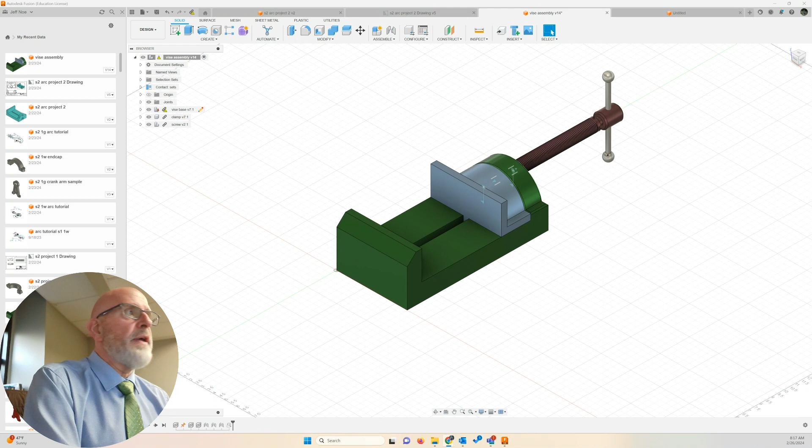So we're going to do the green portion today, which is the base of the vise. So what we're doing today will look like this. We're going to start it from the side profile. Okay. We're going to put this on the front back plane. All right. So we're going to start by sketching out this side, excluding this angle here, which will be a chamfer we apply in the last step.

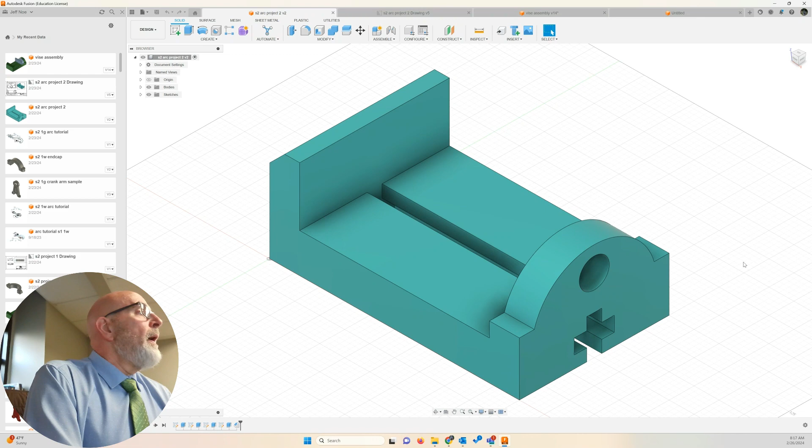And we've got our dimension drawing. So we're going to draw two rectangles, this view here from the side. So we've got 250 millimeters as the overall length here. Looks like it's going to be 100 millimeters tall here at the back and 30 millimeters wide. So two rectangles, one 250 by 40. Okay, this is going to be the origin right here at this bottom corner. Then from the origin as well, 100 millimeters by 30 millimeters.

We'll trim out the interior, extrude it across the full width, which happens to be 150 millimeters. And that will be the foundation of our base. We'll come back on the front face of our design, and we're going to create this slide. This is a groove for the vise piece that moves back and forth to slide along.

Okay, we're going to create that groove on that front face of our design, and we'll figure out the midpoint of that face and draw a couple 40 by 15 rectangles, and then extrude it. And instead of extruding a certain distance, we're going to extrude that shape back to an object, and it's going to be this back face. That way, if we happen to change the length of our design, our extrusion will adjust with it.

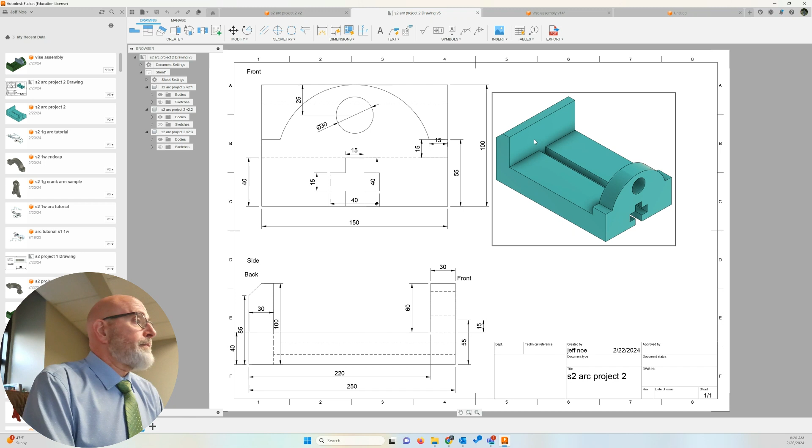Extruding to an object is often very convenient. We'll use it in several other projects like the Lego brick project, for example. Gives us a lot of flexibility. Also, if we are extruding to a shape that's curved, it's got an arc in it, by going a set distance, your extrusion will go out that set distance and it won't accommodate the curve. If you extrude to the object, it'll extrude to the face, that arced face of an object, and take the shape of that object that you're extruding to. So, nice features with the extrude to object.

Then we'll create this upper section. We're going to draw a line across the bottom. We'll draw lines up 15 millimeters and over 15 on both sides. From the midpoint, we're going to draw a construction line up 60 millimeters. We'll have the 3 points then to a 3-point arc. Okay, create that, extrude it back 30 millimeters, and then place our hole, which is 30 millimeters in diameter, 25 millimeters from the top center of our arc here. Let's get started.

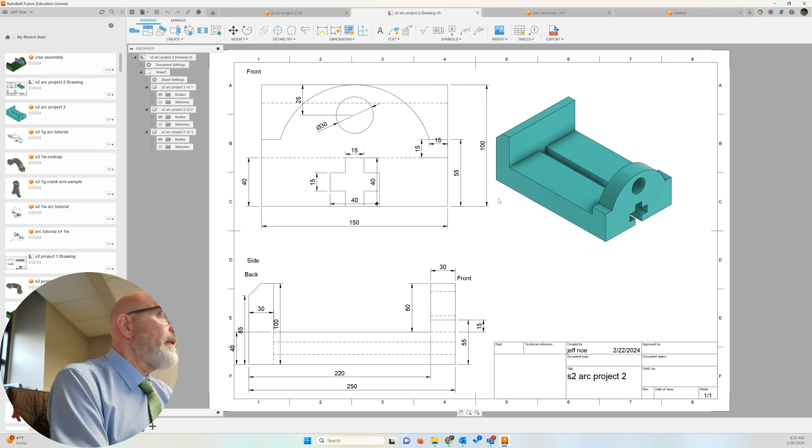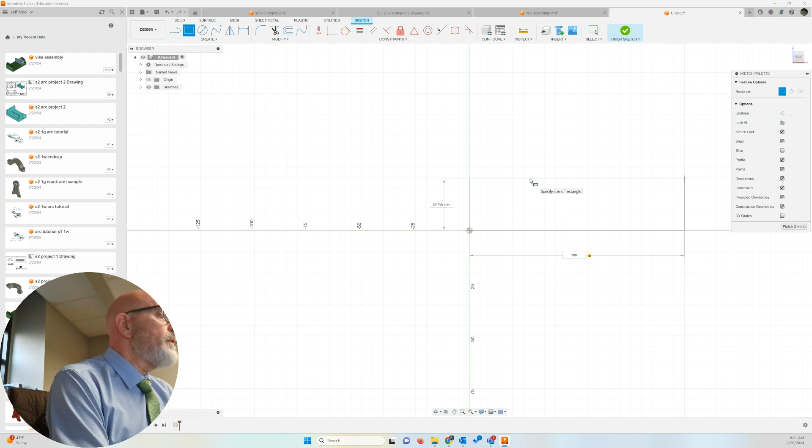Okay, let's create a sketch. We'll go to front back plane. Let's create a 2-point rectangle. From the origin, click 100 millimeters. No, that's not right. 250 millimeters. All right, by 40. Okay, let's fit. There it is. Let's draw our second rectangle, which is going to be 100 millimeters by 30. So there's the 30, 100 millimeters tall.

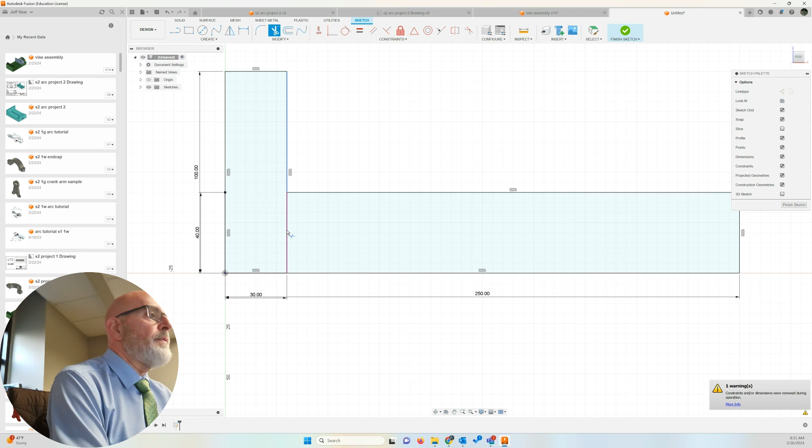All right, see that? Let's trim away the interior lines. Remove and remove. Let's finish sketch. Home position. Let's extrude 150 millimeters. New body. Click OK. Notice I'm trying not to give you all the menu commands as much as what I normally do. I'm expecting you to know that by now. Let's create a sketch on this front face.

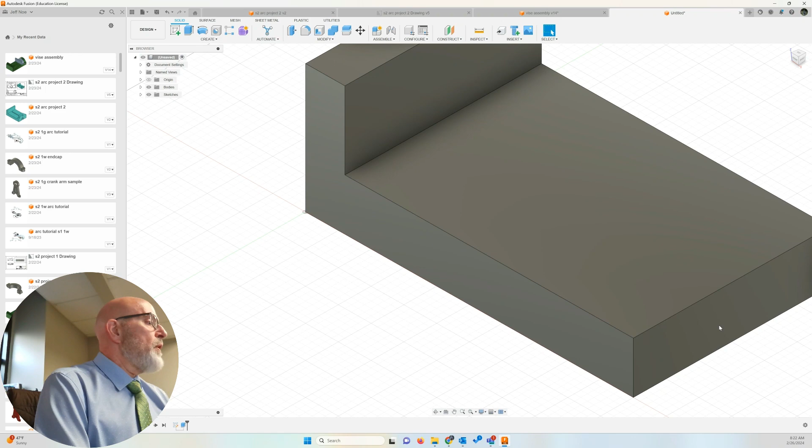Move it over. Zoom in a touch. Okay, so there's the front face we're sketching on. I need a center point. Now, if we draw a center rectangle, we'd get two diagonals. And where those two diagonals cross would be the center point of our rectangle.

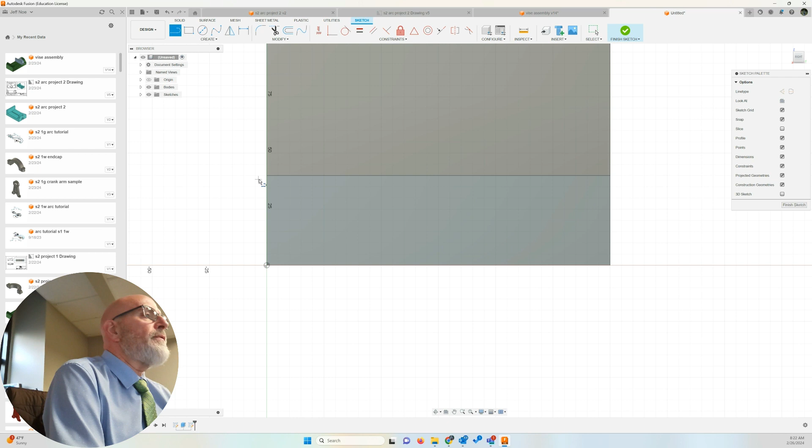So let's draw a line from one corner to the other corner. There's a diagonal. Let's toggle it to construction. So I'm going to hit X, select it, hit X. Now, do I need to draw the second line? No, I do not, because Fusion will give me the midpoint of this line, which is where the second line would cross it. So let's create rectangle and center rectangle. Let's find the midpoint.

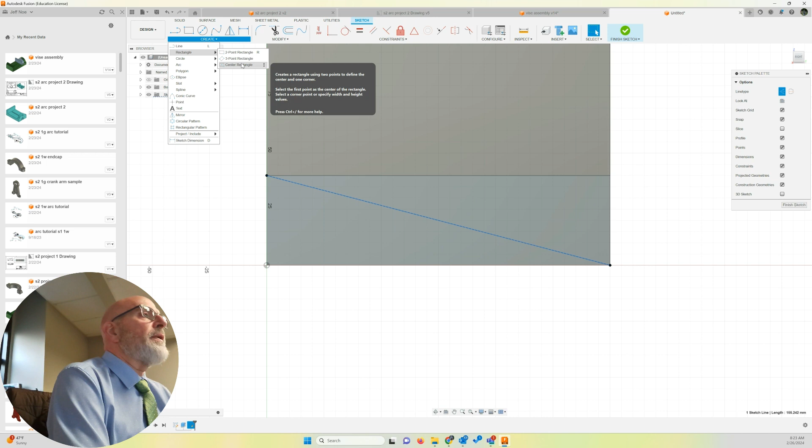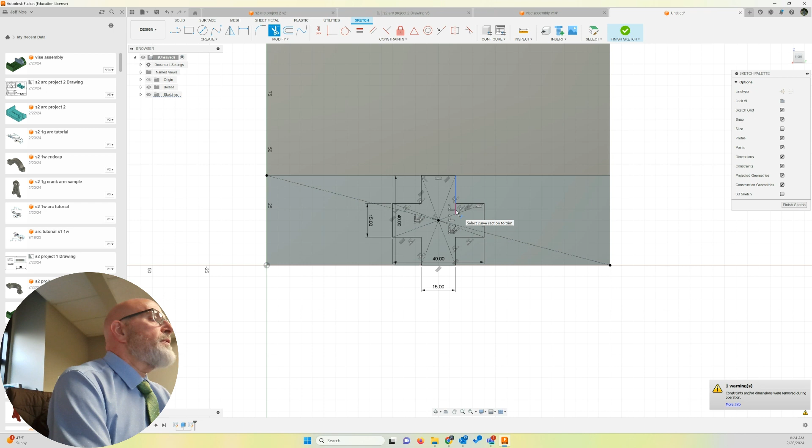There's my triangle. Click. All right, my first one's going to be 15 millimeters wide, 40 millimeters tall. Okay, let's draw a second one. All right, 40 millimeters wide, 15 millimeters tall. Let's trim out the interior portions of this. So isolated lines aren't going to hurt anything. There, I have an enclosed shape. All right, let's finish sketch.

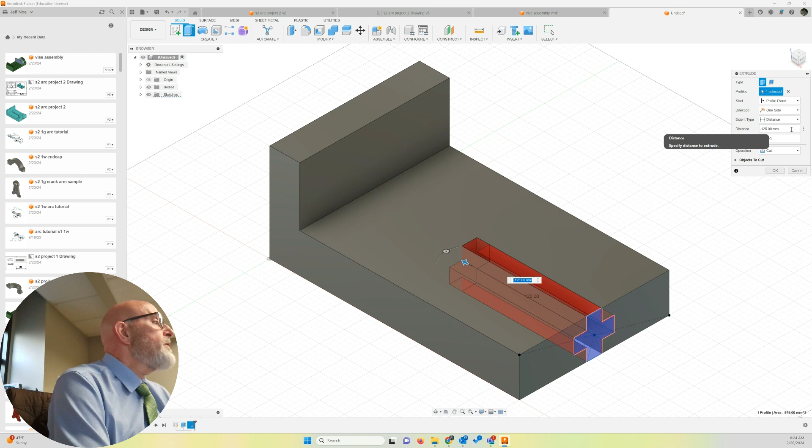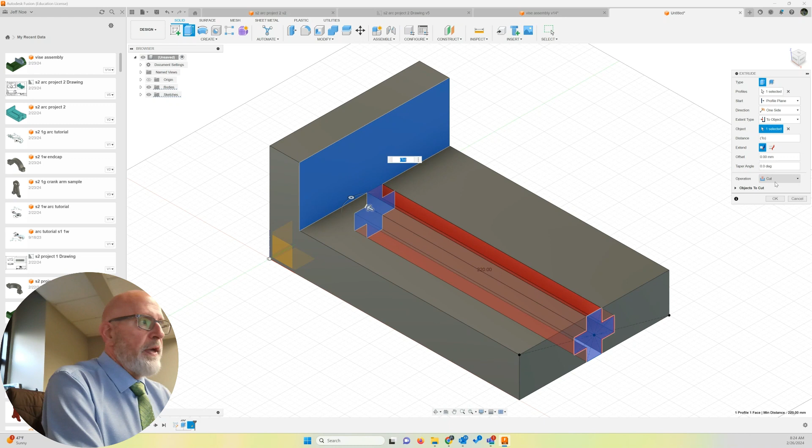Home position. Let's extrude. Now, as I said, I'm not going to go back a distance here. Let's change our extent type from distance to object. All right, I lose my dimension box. And now I need to select my object. I'm going to select this face as the object. And it extrudes back to that object. It is an operation of cut, which is exactly what I want. Click OK.

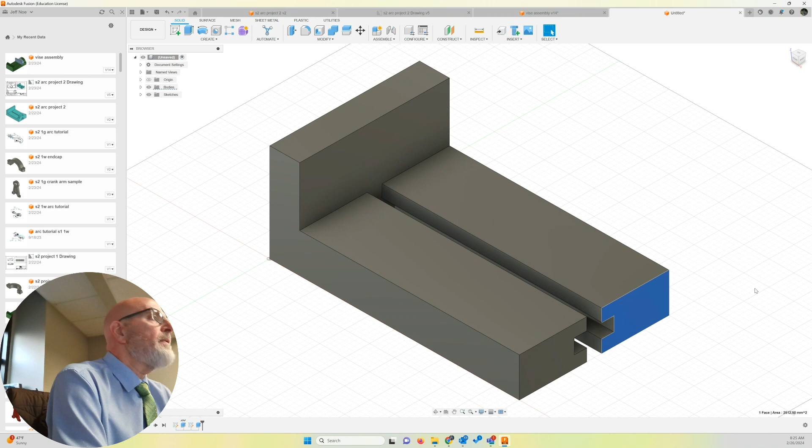All right, now let's create a second sketch on one of these faces back. Okay, we're going to select that face right there. Let's create a sketch. There's that face. Let's fit. All right, now I won't have access to the geometry on this side or to the edges. I don't think anyway. But I'm going to start at this corner.

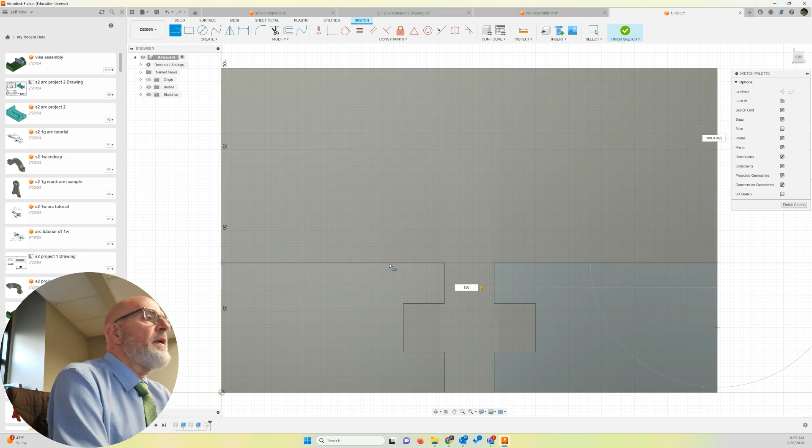All right. I'm going to draw a line straight across 150 millimeters because that's the width of my design. Click. I'm going to go straight up 15 millimeters. Click. And over 15. All at right angles. Okay. So there, see my constraints as being perpendicular. All right, oops, close the line tool.

Let's do this side, up 15. No, it's not perpendicular, is it? Undo. Let's try it again. 15 millimeters, 90 degrees, good. Click, and 15. 90 degrees, good. Escape out of the line tool. All right, well, actually, I needed one more line. I need it from the center point here.

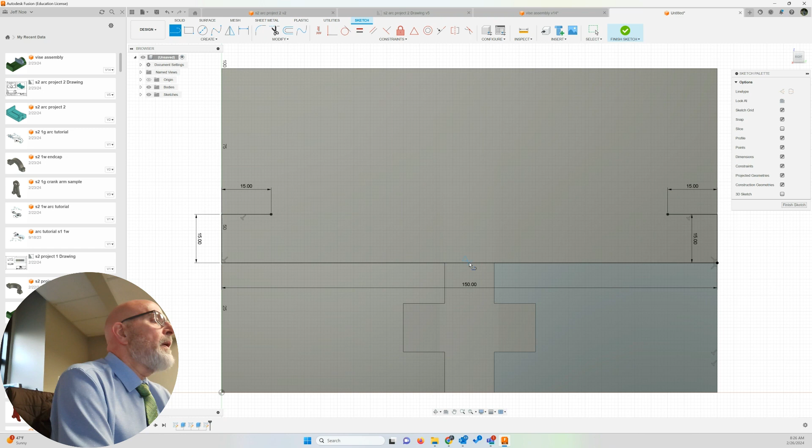All right, our total height is 100 millimeters. This bottom portion is 40, so I need to go up 60. So there's my midpoint, 60 millimeters. Click. Escape. And it's thinking about it. Now I'm going to hit X, select the line, hit X, and I'm toggling to a construction line.

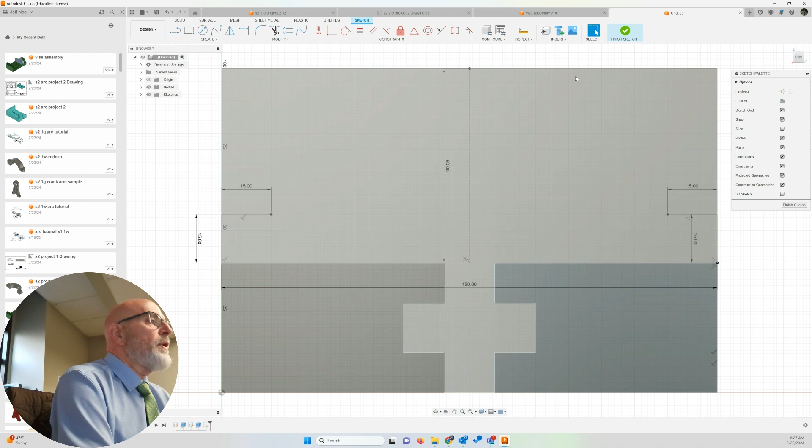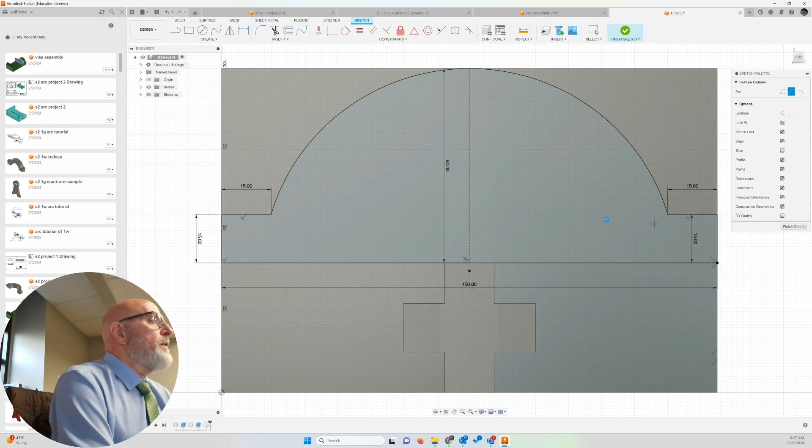Let's draw our arc now. Create arc, 3-point arc. First endpoint, second endpoint, up the construction line. There we are. There's our enclosed shape. Finish sketch, home position. Let's extrude at 30 millimeters back into our design. Extrude, -30 with a join. Click OK.

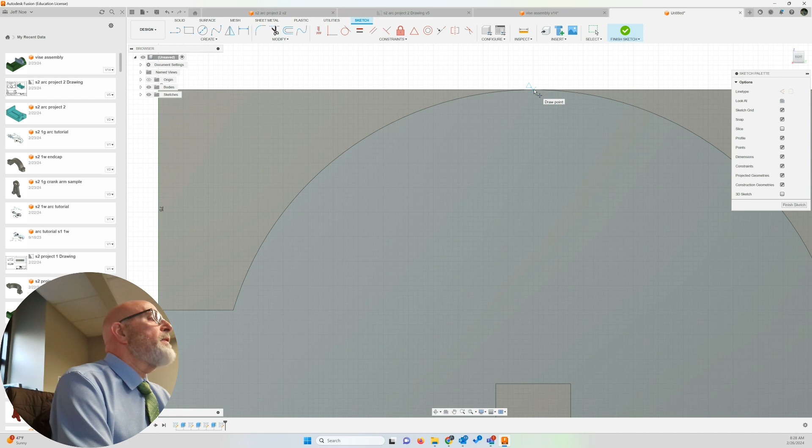Last sketch. Let's create sketch. We're going to go back to this front face. All right. I want to set a point. So create point. This is just going to give me a point that I'm going to use. I want it at the midpoint of this arc. There it is. Click. So there's a point. Now, let's create a circle. Anywhere in here, 30 millimeters in diameter.

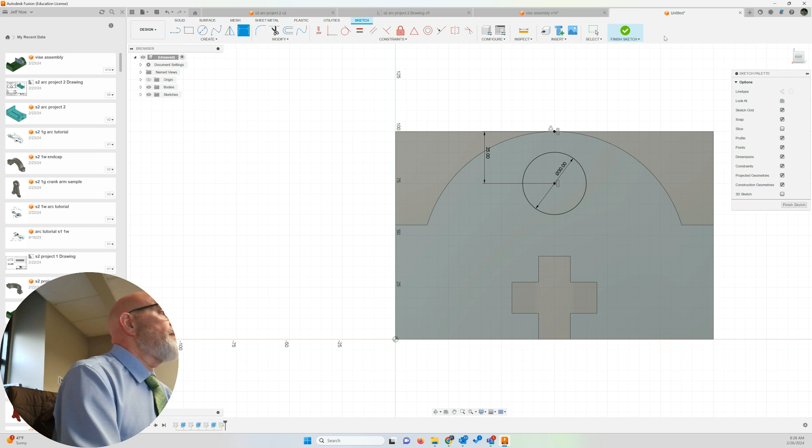All right. Now, I set that point on the midpoint, so it should be tied to that. Let's set a vertical constraint from the center of the circle to the point. Make sure that they stay vertical. And a sketch dimension then from the center to the point of 25 millimeters. And there we are. We have the hole in place. Finish sketch. Home position. Let's extrude that hole.

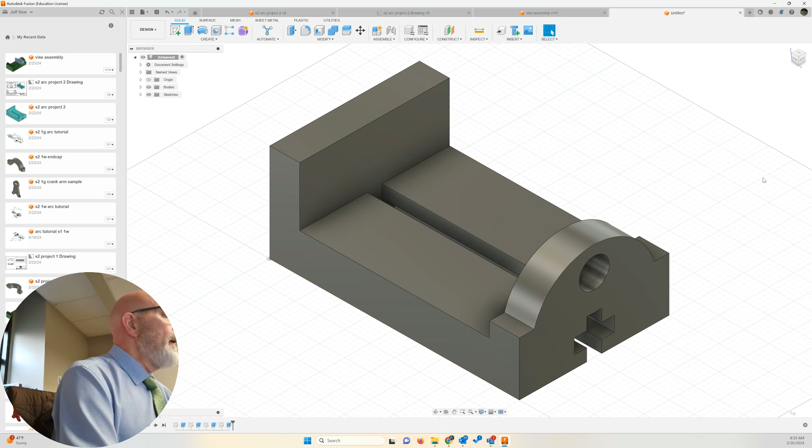Cut the hole. Oh, missed it. Let's try the extrude again. Select. Grab the arrow this time. There we go. That's better. Click OK. Got to cut. All right, and we're done with the project.